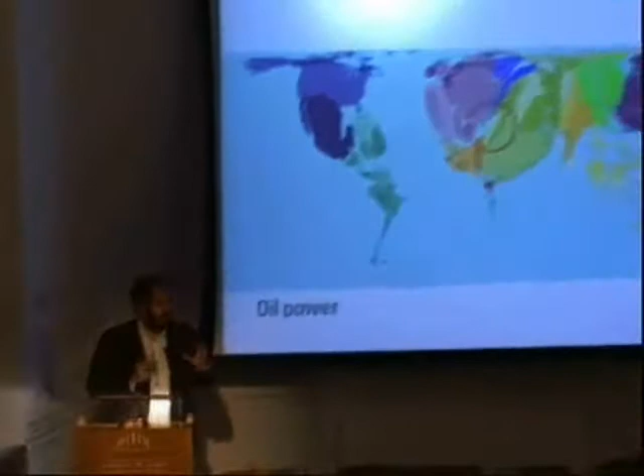This is the scale, a geographical map, but if I change some parameters in terms of dimension, this is a modification of a map based on oil power—a country using fossil fuel to run the country. That shows what it means for north and south of the world in terms of economy and development. You can see Italy is very fat because Italy is 80% dependent on oil.

But you can see also other countries like Japan, and I noticed Israel is quite big too. They're also showing the debate in Durban, which finished yesterday. I was there last week talking about some green schools and buildings.

I think the interesting thing in the Durban final chart is about transforming these oil power countries into green economy, shifting the CO2 emission also to green power and green economy. I think this is a really interesting thing.

But if I look from a different point of view, I can see what we call ecological footprint—the size of land we use for running our style of life. You can see again how one of the major points is not only the consumption of energy, but the style of our life, which demands more and more production, food, electricity, and many other things. So you can see the map is very different.

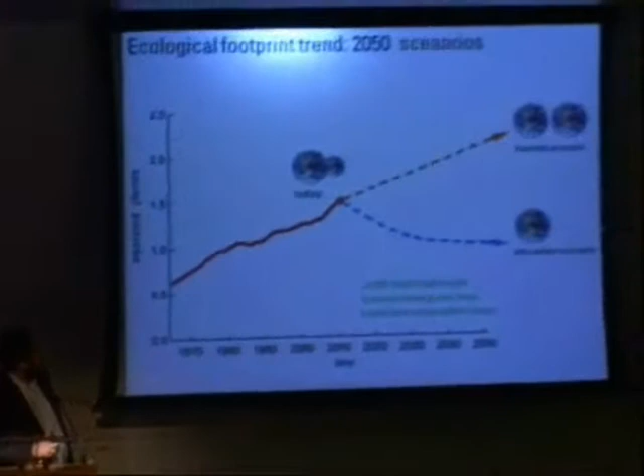Impact. Based on what we find as information, when we talk about zero carbon economy, or the green economy, I think we talk about something really serious, because I think we don't have an option—there's no option. If we run business as usual, and we're in 2010, I think we get a really serious problem in the next 50 years.

And that's why I think the agreement in Durban talks about 2020 and a vision of 2050, because as business runs today, I think there's no chance. So I think moving to zero carbon economy, or green economy, whatever you want to call it, is fundamental.

And then buildings can play a fundamental role. I must tell you why I think architecture is very important—whatever is important in any case, but buildings consume almost 50% of all energy produced, which means a very important issue is designing the next generation of buildings which dramatically reduce the demand for energy.

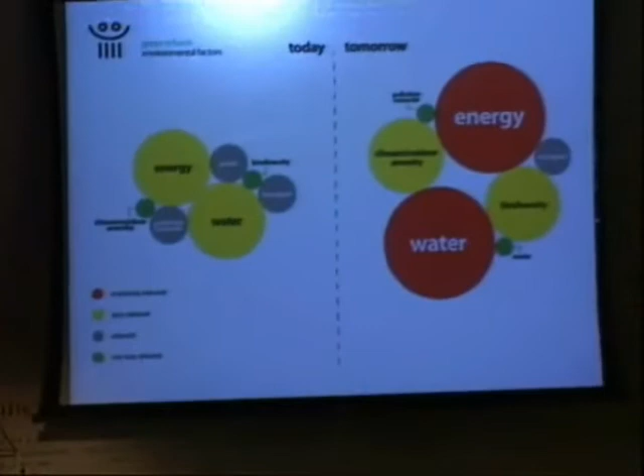I will bring this in to see what will be the major environmental factors. You can see from the colors what is extremely relevant and irrelevant. Today still energy and water are very relevant, but you can see pollution, transport, waste and other things too. But what happens in the next 20 or 15 years? Energy and water will be the two major factors of conflict, but also the two major factors we need to deal with, how to improve this relationship.

You can see pollution is reduced because if we switch attention to the new green economy, maybe electrical cars and more efficient systems of cooling and heating, then we will dramatically reduce pollution and noise in the next 20 years, but we'll still have quite a problem about climate/outdoor amenity. And of course the major point will be access to water.

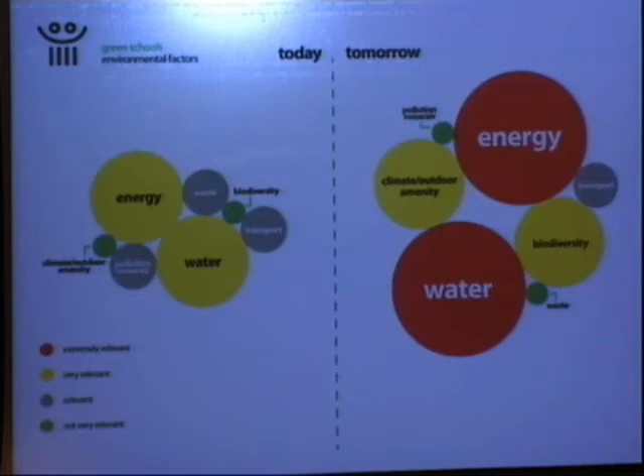So I think this also helps put ourselves in the agenda. I think when you design, you always need to have some priority in your agenda. If you just move environmental issues to the top of your agenda, I think you start thinking in a different way about your building.

Let me give an example of the timeline and how cost works in a building. So the two lines are the cost of structure and facade. I say that because sometimes we need to decide where we're going to put the money on buildings. Structure doesn't really change over time, it's always very solid, you're not going to move or replace the structure. The facade, over the life of a building, you maybe change twice.

M&E, mechanical and electrical engineering services, the life of this equipment is quite short, like 15 to 20 years, depending on the quality of the product. Of course furniture changes much faster, but IT technology we change very quickly, all the time.

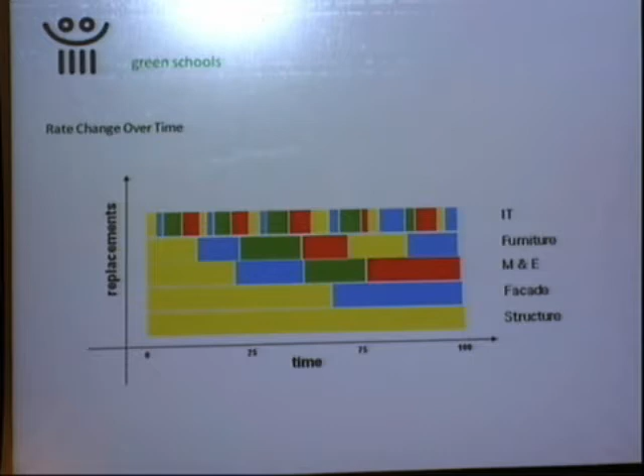So when I'm looking at this, I say maybe what we really need to invest in for the buildings in terms of the future is really the structure and the facade of the building, because they are the two permanent things that we'll be keeping for a long time. Investing in facade has become very important because you're not going to change it so often, and facade is always a sort of climatic moderator between outside and inside of the building.

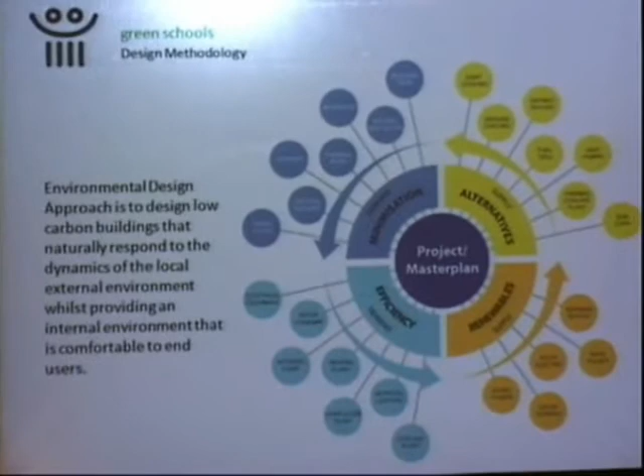And talk about sustainability. So I'm sorry to be a little bit like an engineer, but I'm not an engineer. But when we talk about solar energy, renewable energy, I think we need to understand and change the process of how to design your building to host this technology.

I think the circle starts from the first, the blue, about the demand. The first point in designing a green building is to reduce the demand of energy by minimizing it through design, using more passive strategies, like the orientation of the building, the thermal mass, the shading, the natural ventilation. So I think we need to minimize the demand to optimize the demand of energy.

And then the efficiency. So the way you're using machines, like in this case with geothermal energy. You start to design a building to reduce the demand, then efficiency in terms of machines, and then you can use solar energy or renewable energy, because if you don't do that process, there's not enough sun and there's not enough renewable energy to run buildings. And then also use the alternative.

I think this is very important, because sometimes architects - I say this myself because I know the work, I know my colleagues - sometimes you want to design a building as usual and then try to put in some solar energy technique, and this doesn't work together, because you need to first start the process of reducing the demand. To do that, it's time for architects - and this happens in many occasions - teamwork with the engineer is very important from the beginning. Because if you don't really create a dialogue between architects and engineers about the shape of the building, the orientation, some techniques, it's very difficult in the end to get really good performance buildings.

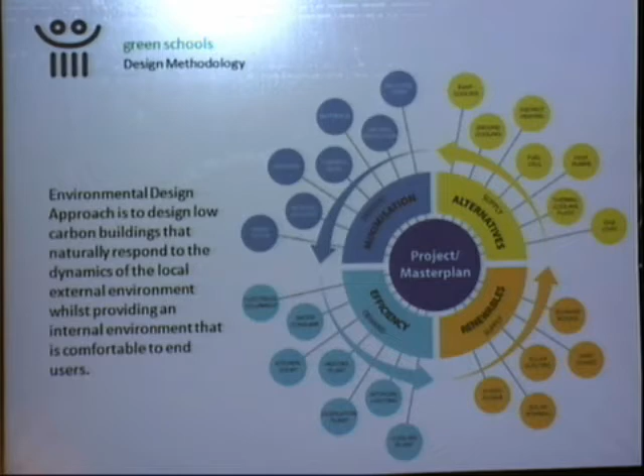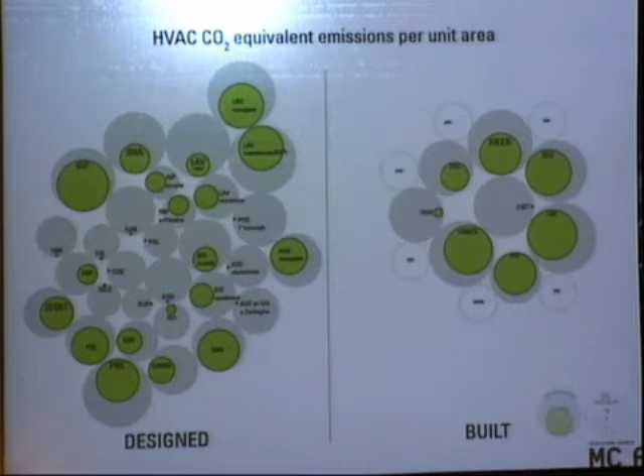And you can see there's constant work on reducing the building's impact. In China, we did 2 buildings, which was much easier - the difference was big. One of the buildings is a shopping mall, which is difficult to reduce so much, but still 30%. The other building, they tried to do the best. But I think what happened in these things...

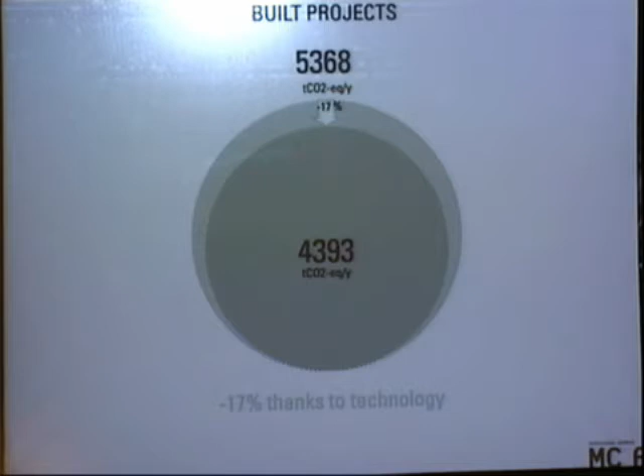...was very interesting when we did this analysis. So we reduced more or less always, by this work, a value of 55% of CO2 emissions through improving the machines and the design. But what we were very surprised by - and which I think is why architects are so important in this process - is that you can improve the reduction of CO2 emissions by using technology, of course, using more performant equipment. But I think the most part of the work is done by the design of the building.

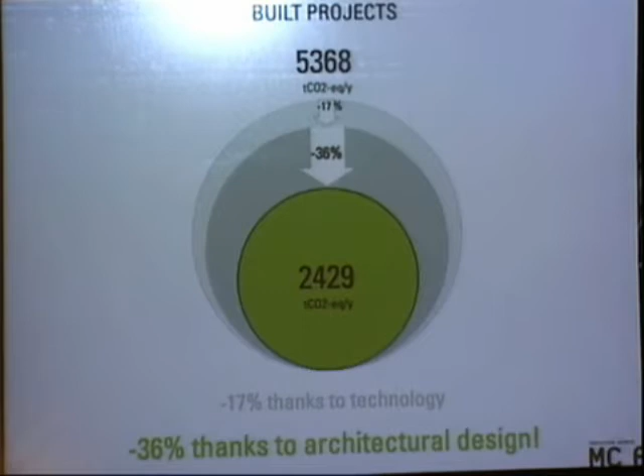So the way the building is designed, the way the facades are made, the orientation of the building, the strategy of passive or active strategy - that's showing, by the knowledge we have, the information we've collected in the last 10 years, how much really depends on the way the building is designed and the work of the architectural design.

So I say that because sometimes I feel there's always the hope that you're using technology to make your building green, and I feel that is quite wrong. You don't use technology to make your green building, but you design a better building, and then use technology.

So with this, how much CO2 emission we save in the last years, we make some calculations. There's a site on the internet where you can put the equivalence and it gives you the ton of CO2 emissions saved. I think the most interesting one is about Italian coffee every morning, and also showing the client how much money we save in terms of buying oils.

So in the last years working in different countries, what are really the two major issues in terms of politics? Diversity of culture and eco-solutions will be essential for people in the future. I'm saying that because there's a lot of conflict at the moment in different countries in Europe about pollution problems, traffic problems, health problems, hydrological problems. These aspects related to the environment are creating real attention, and it will be a political issue in the future - whether politics and political leaders are able to moderate this conflict.

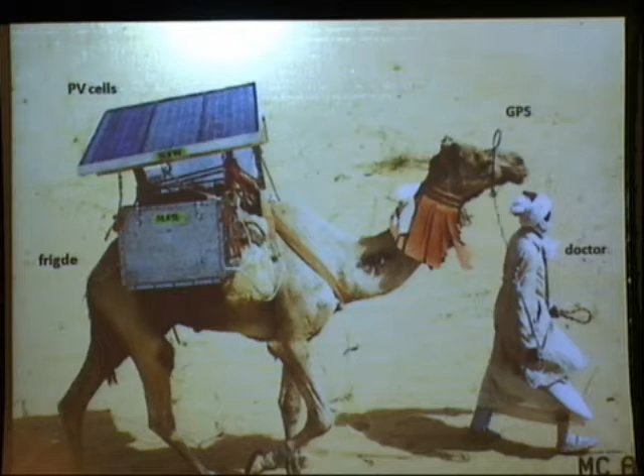So I feel we need to make a shift through knowledge as well as a technology shift. I think the problem is how we're able to have enough knowledge to design buildings properly for a climate, and then use the technology. In this case, you can see it's the most advanced technology with a very traditional relationship with that climate. It's impossible to go around the desert with a jeep because you need so much gasoline you can't make it. But these guys and these camels can. So I like this balance between technology and tradition.

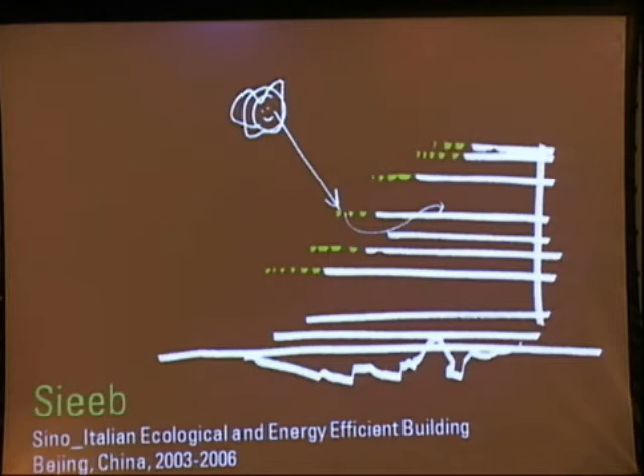So now I'll show you some buildings, because maybe you thought I'm talking too much and not doing my work. This is a building we did for the Minister of the Environment, in agreement with the Minister of Science and Technology in China, in Beijing. This is a building for a university building at Tsinghua University - actually the built environment department.

When we started the project, it was interesting because Italy invested 20 million euros on the Kyoto Agreement to show in China - this was a decision to show an eco-solution in a country growing so fast, which was interesting in terms of economy, business, and also knowledge transfer. So the idea of the building was to consider these leaves as our building, as a concept.

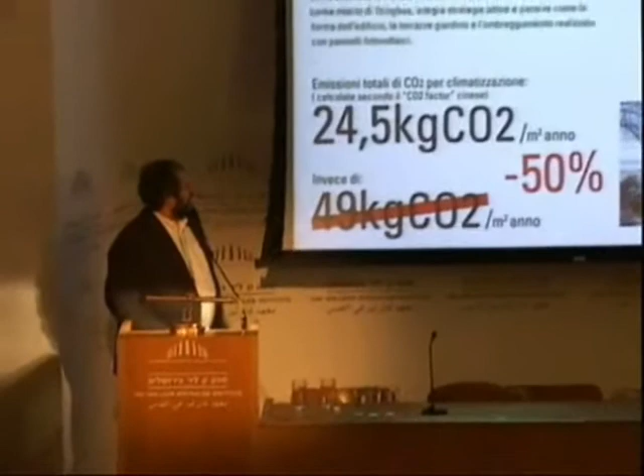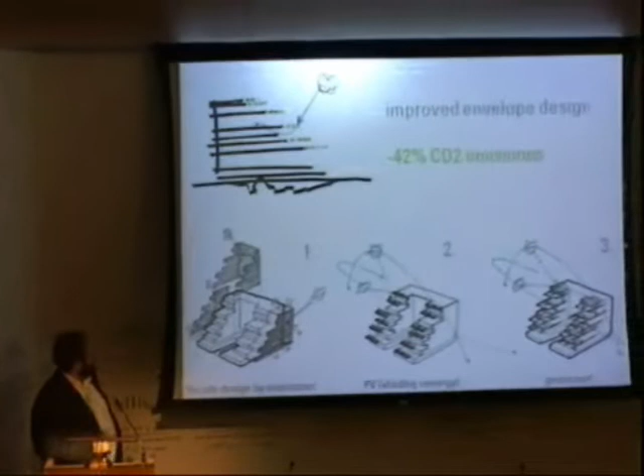The idea was to design this building based on this simple sketch - maybe it's over there, exactly. It's a building based on one direction, south and north. The green dots are south facing, and the wall is on the north face. There was a fix on that placement.

Then we analyzed with the Polytechnic of Milan, the university. We studied and did a lot of work on shading, shaping the building. We have these three strategies now. First, the building is facing south with a terrace, so we benefit to maximize the solar radiation in the summer and winter. Then the building has a wall, like a shoulder, on the north face, because the north face is where wind comes from the Gobi Desert in the winter.

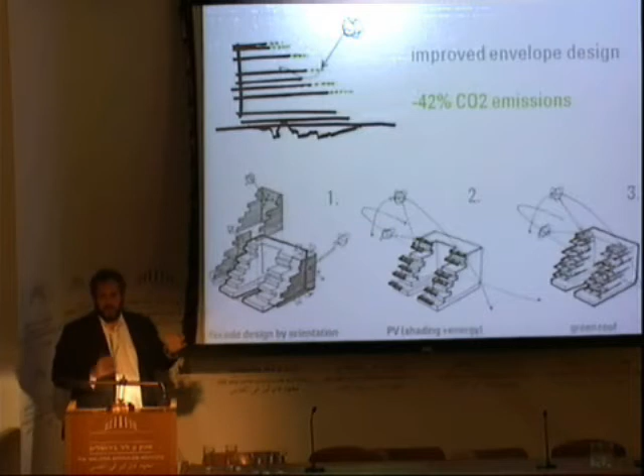It's very cold, freezing in Beijing for a couple of months, and we want to keep this building protected against this wind. So it's a combination of three basic strategies.

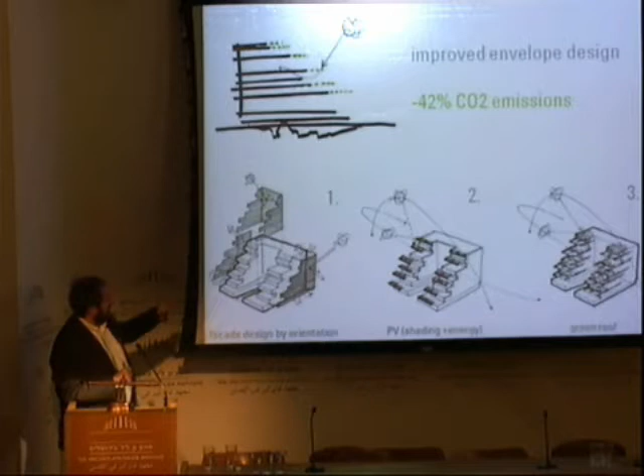The orientation, east and west, the facade allows us daylighting during the morning and the afternoon, so we have two wings that always benefit from daylighting. PV cells, photovoltaics on the roof and the terrace, providing shading and energy, and of course the green of the terrace.

And then the efficiency was done by, fortunately, the campus using natural gas for running the heating and cooling system. So we're using a cogeneration - a machine that makes heating and electricity, a low temperature system on the roof, on the ceiling of the building, and photovoltaics.

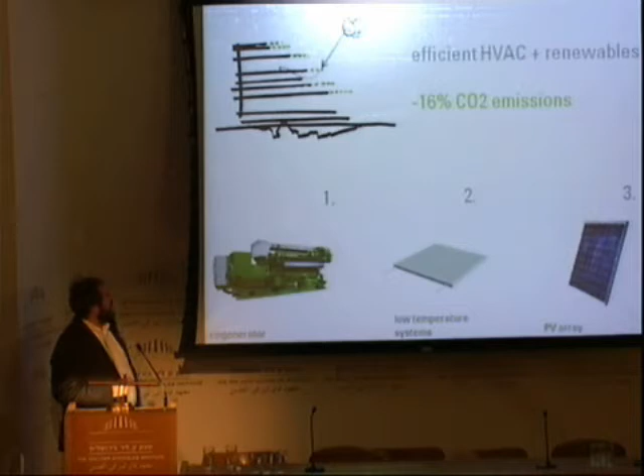The idea was, in the middle season, when temperature and humidity outside are quite in the comfort zone, to use the building and sell energy. So the building produces more than it needs, and sells energy, which I think was also one of the points of your institution. I think this is one part of the solution.

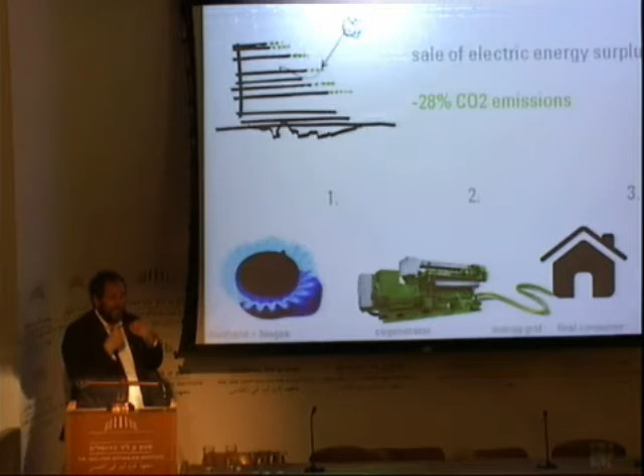I like thinking that the next generation of buildings are no longer the problem of energy, but maybe the solution to the energy problem, because every building can be a little power station that produces for itself, and when it doesn't need it, it can put it on the grid, which I think is absolutely achievable.

So that's what we say in the end - by using a different system of air conditioning and the building shape, we get at least 86% reduction of CO2 emissions based on Chinese buildings from 2006, which looks like a lot, but in reality the level of standard buildings in China was so poor that it was quite easy to improve faster.

I think it was a very interesting discussion in Beijing, because at a certain moment Chinese academics said, well, in China our buildings are fully sustainable because we consume 55 kilowatts per square meter, and Americans consume 560, Europeans 350. So they were showing there's no ecological problem in China, which is quite strange to hear from them. But then someone said, well, how do you do it?

They said, well, we only allow air conditioning 2 hours a day in the summer, and we only allow the heating system in the bedroom 2 hours at night in the winter. So, well, if you do it like this, it will be very difficult to compare consumption, because we are not living in dictator areas, and I hope we don't need to arrive at that point to reduce energy consumption.

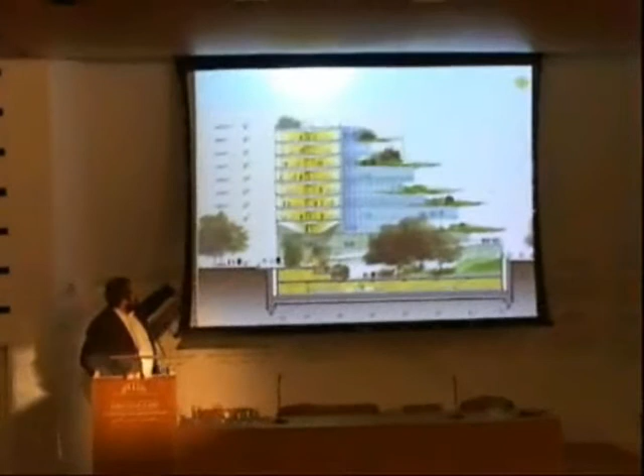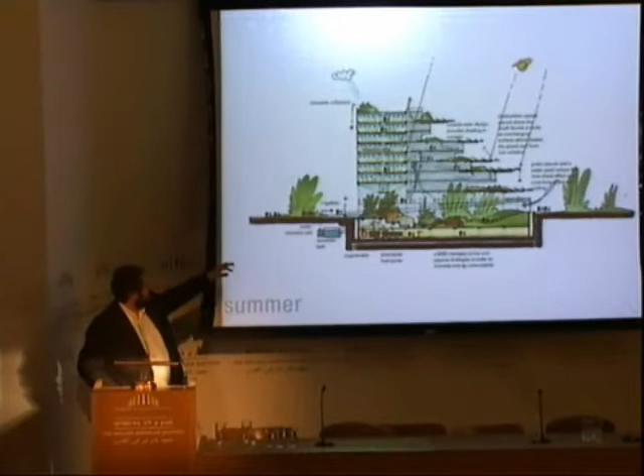And this is the section through the building. It's the 2 levels of parking, a garden. The strategy is about shading the building in the summertime, improving with the garden the ventilation and cooling through fountains and greenery, and in the winter, optimizing the solar gain, especially for daylighting and

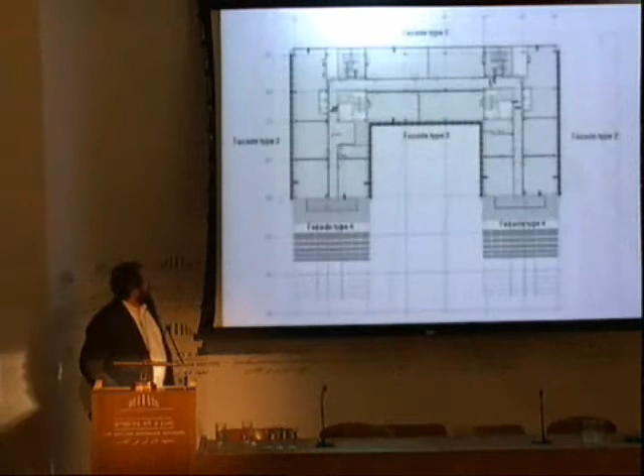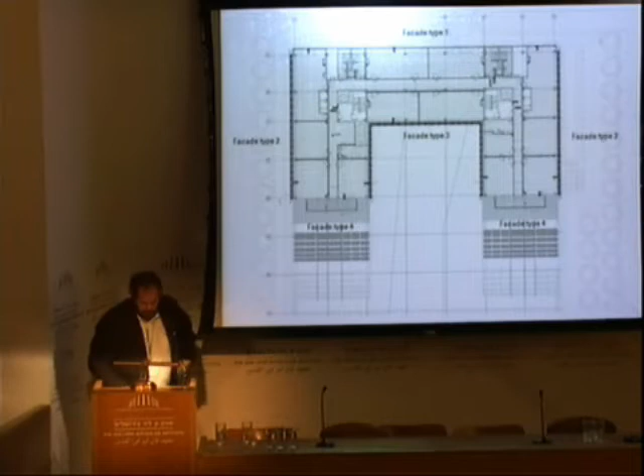So this is a plan. You can see the C shape helps us optimize the sun and daylighting during the day through the east and west facade. Also, this is the north face, very well insulated.

70% of the facade is opaque. You can see from here, very heavy insulation. And on the east and west, we're working with an open double skin facade, so we allow ventilation through the area between the two glasses. But behind, you can see, 50% of the building here is opaque and insulated. That allows us to reduce the demand of heating and cooling, but also increase the ventilation through the two gaps, like a buffer zone.

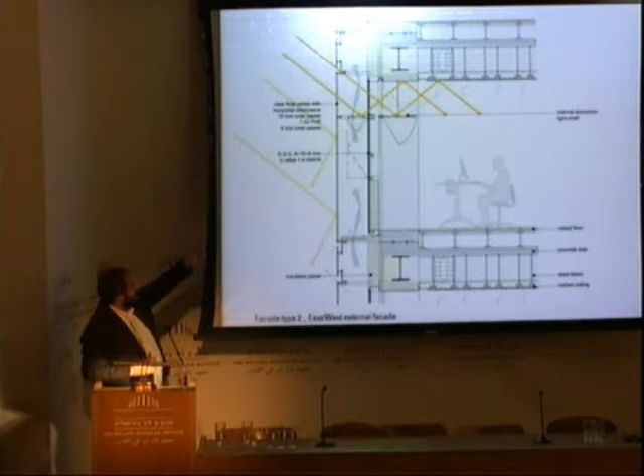And using some details, which is quite full in literature and architecture, the light shelf can help quite a lot, improving the daylighting inside of the building, bringing daylighting through the room.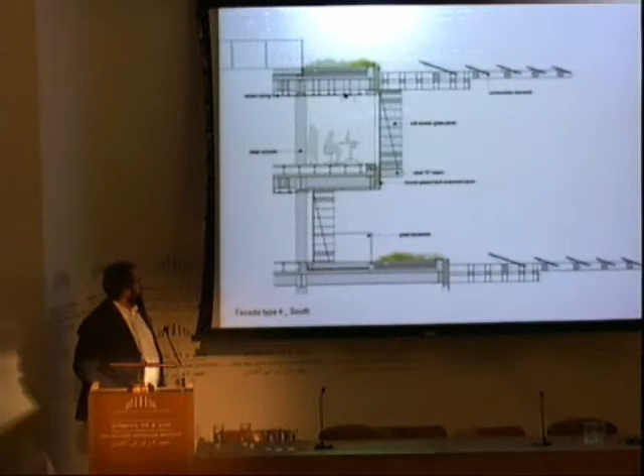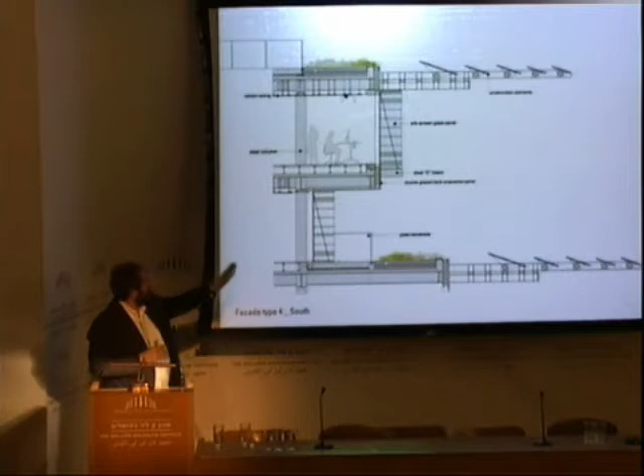And this is the terrace system. The idea was the terrace would grow with greenery, and the cantilever was another set of leaves, but photovoltaic leaves. Also these cantilevers help in the summertime to shade totally the south facade of the building. So you can see in these pictures the photovoltaics and the plants and the building.

And this is the internal garden. So it was very important that the building was open. You can cross the building. It's not a wall.

The first level on the ground was a public exhibition center and a conference hall, and the first floor was another exhibition. So you can see this is the entrance of the conference, and that's the building from the street.

And that was a very interesting experience, also because the Tsinghua University is very knowledgeable on green issues. It was a very good partnership also between universities in Italy, and then I did this project for social housing.

There's a big debate, and I noticed in the newspaper that also here was a big debate by young people about affordable housing. Well, in Italy there are 5 million people who have very difficult access to housing, whether renting or buying, and a young couple also have very difficult access to housing.

So we made a proposal. I'm not designing a residential building, but in this case I think it was very important to give an example, and we studied housing by three points.

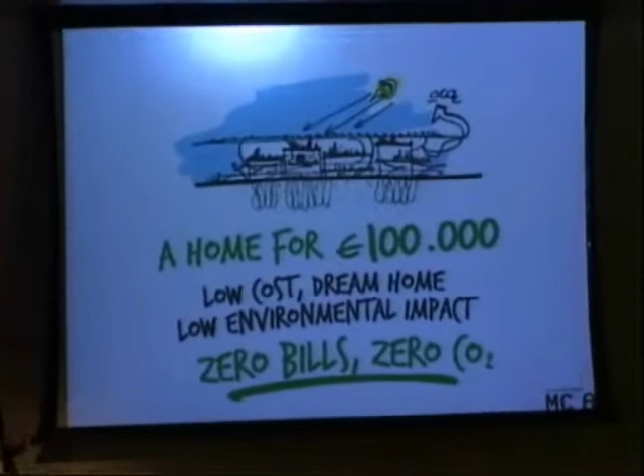Especially if you design a building where, in this system, and also by the Italian regulation, if you produce clean energy, your kilowatts is paid 4 times more than a standard. So if you're able to have a very low energy performance house, you can sell the energy, and get a microcredit, which is about €200 a month, enough to pay half of the mortgage.

So why are we not going to do it? Why not? Let's start to think that maybe construction is a problem, something polluted using material, but maybe construction is also something that's solving problems. I want to look at this as a positive action.

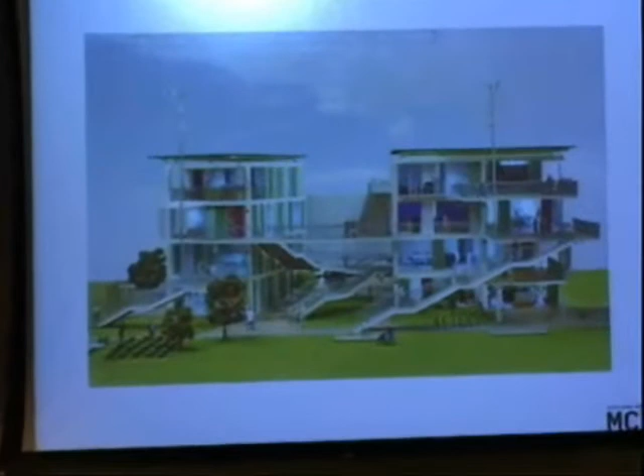This is a model of a different organization of housing. There's no single lift with stairs, but a different way you access your apartment. There's a lot of demand for community, in Italy but also across Europe from families we've worked with. There is demand for a creative sense of community in buildings, not a sort of 'nobody wants to know their neighbor.' That's partly true, but not entirely. I think architecture can help improve, or not improve, the quality of relationships.

And of course, it's combining the two techniques, the geothermal that we heard about today, and electricity from the solar panel.

Now we are under construction of public buildings close to Bologna, for the Agency for the Protection of the Environment. It's always a question of tools. Architects use pen, AutoCAD, drawings, models, but also there are environmental tools. This picture shows a laboratory in Lausanne, Switzerland, with an artificial sky, a place where you bring your model and analyze the quality and quantity of light inside your buildings. That's a new generation of tools.

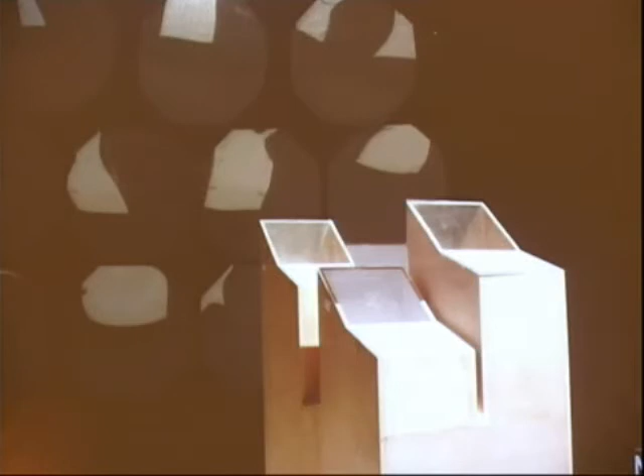It's a toy also, because it's quite funny. But also you can use digital tools, whatever you want. I'm always very interested in the practical activity—you make your models, bring them to a laboratory, and run your tests. A day of testing in the laboratory costs €500, so it's not tied to any fee on the project. The models cost around 150, and we run all this analysis.

And of course we also use Radiance. In my office we have different expertise—we work with engineers, fundamentally, and they do the work. But especially in the preliminary stage, you may not have the chance to work with all the engineers and pay fees to everybody, because the client asks for a preliminary design. We have two architects working on simulation, coming from PhD studies, and a model maker who builds all the models.

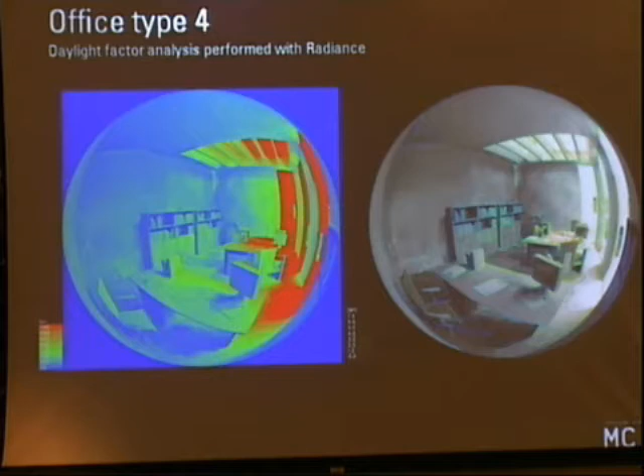That helps us at the beginning of the process to make the first analysis, so we know where we're going. Of course, we're not trying to replace the engineers, but they work with us—in the beginning, we do this kind of analysis.

This project is about what I call forms and performs—how much the form of the building can help its performance. This is a single-floor building, a laboratory and office, with a roof shaped like a chimney facing the sun. We're in a very hot climate, in the plain, a low area with a high level of humidity. So especially in summer you need to increase natural ventilation for more airflow, and in winter you want to use the chimney as a collector of hot air.

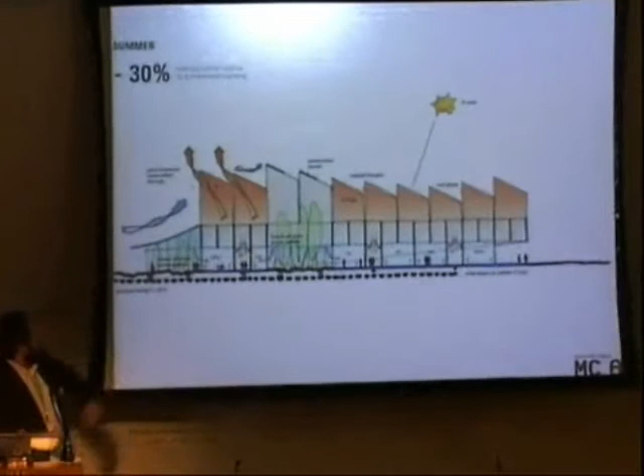Of course, that's not enough on its own—you need a radiant ceiling and a bit of fresh air. But what I'm saying is, if the building itself, through its shape, is already able to do some of the work, in this case we're talking about 30% energy saving in summertime.

By using this chimney effect, collecting hot air at the top, we increase ventilation inside the building through this garden. Or in winter time, on sunny days, we collect hot air at the top of the chimney and with the fan mix and warm the air to recover the system. So in some way we try to optimize with the shape.

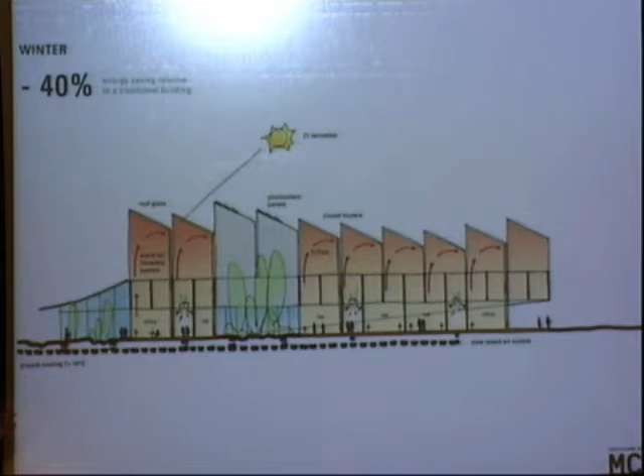And here you see the models. And this is the project.

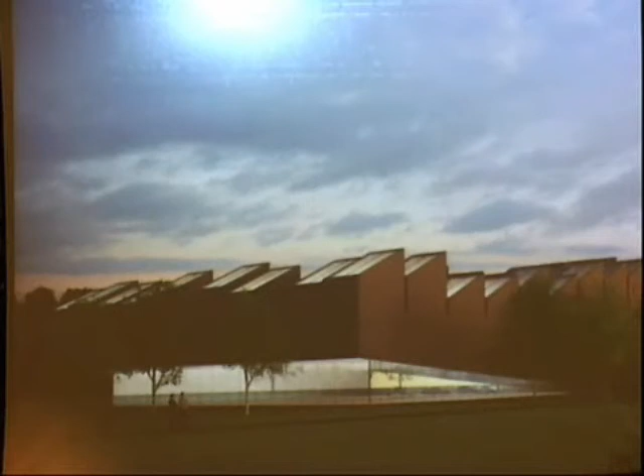This is the first public building done in Italy built only in wood construction, done by a company from the north. We're not very far from the forest, and it's a company that does all prefabrication in wood. It's a clean site, only a platform in concrete, and then everything is built on site with a prefabrication system. If I have a little more time, I will show this.

Okay, thank you, I hope you appreciate the work. So this is the 3M company, the American chemical company, which has a very high policy on sustainability.

We did this work for them, the headquarters in Milan, in a very busy street outside of Milan, close to the airport, with this kind of effect, and basically nothing really around. The building was done as a very standard office building, because when we work fully on the market, we are not doing a special building, we're working on offices, university buildings.

Sometimes I think there's no real point in investigating or rethinking performance in terms of efficiency of an office space. There's a whole history about grid structures and dimensions of the space. So we worked to maximize the use of this rectangular space, with the building oriented north and south, and this is east and west. So the building explores ideas of how to deal with this.

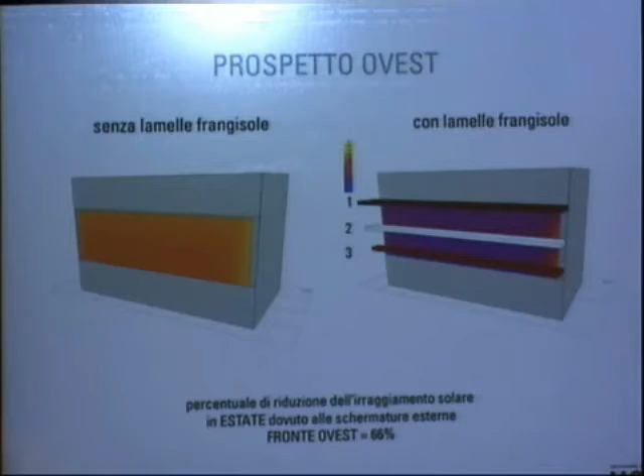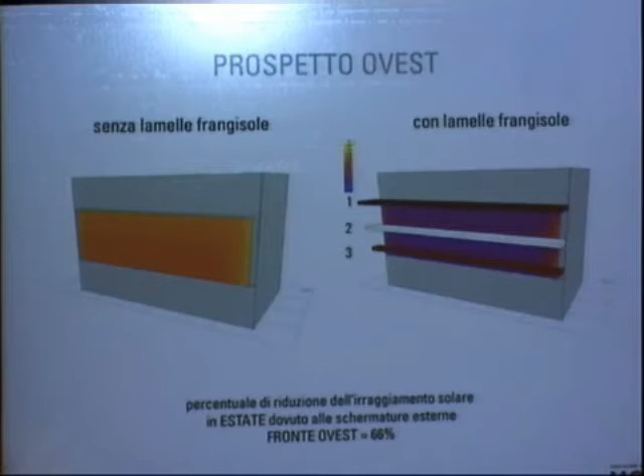Why are the elements of the facade so important? Because you can see, without louvers and with louvers, how much you reduce the solar radiation on the facade. The benefit is in terms of reducing the cooling demand, but also in terms of comfort.

When you make a glass facade, you have a problem when you come very close, because you have air conditioning and whatever, but when you come close with your seat, your table, the radiation and surface is very hot. So you need to move your table and you don't optimize the use of the space. That's the work done by the louvers, reducing heat so you can be very close and maximize the use of the office space.

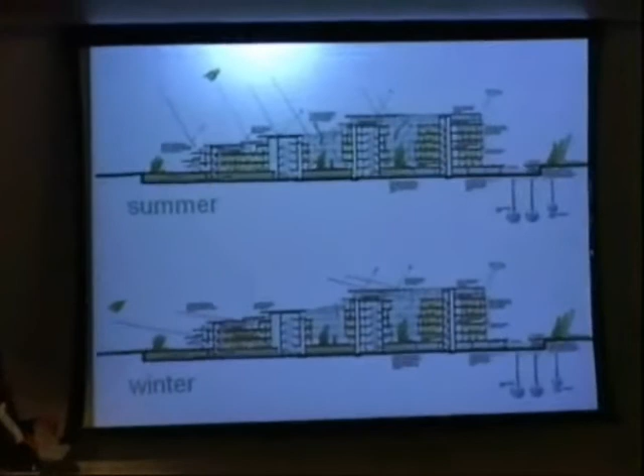And we have two little courtyards, which we use to ventilate the building. Of course, the client invested in 2,050 square meters of photovoltaics on the roof, bringing the building's CO2 emissions down, because we use the PV cells to balance the use of electricity.

And this is a classical speculative office building. I mean, it is in the market, costs 1,500 euro per square meter, which is perfectly in the market.

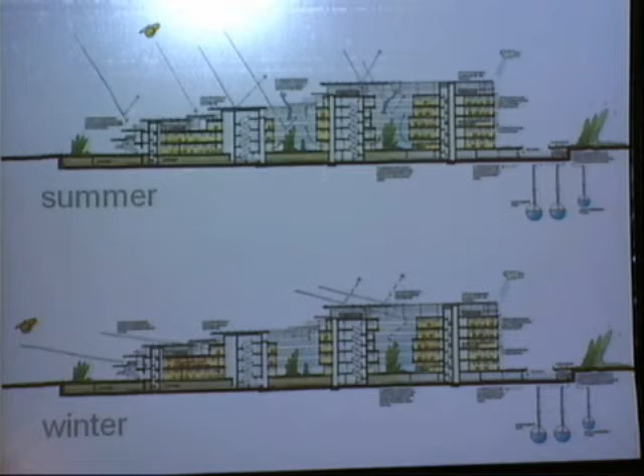What I'm saying is really the question is how you think about your building, not how much money you put into your building. Of course, it is an extra cost because the client put in 2,000 square meters of photovoltaic and spent quite a lot of money, but the building can be run in any case. So it's the way you use knowledge to use the money.

And this is the detail of the building. And that was another really very interesting experience in China. I'm a visiting professor in Nottingham, and I was asked to make this little center for sustainable energy technology, which is actually a PhD student building on that matter.

Nottingham University made an agreement with the Chinese government to build a new campus for 22,000 students, built in just 18 months. This is the Chinese way to do it — a huge campus. One of the major sources of profit for campuses in England comes from Asia, but they started to reduce entries because it became too expensive.

So they built an English campus, where some students could go to do only the master's degree in England, but complete the diploma in China. It's huge, and then they asked me to design a small building, less than 2,000 square meters.

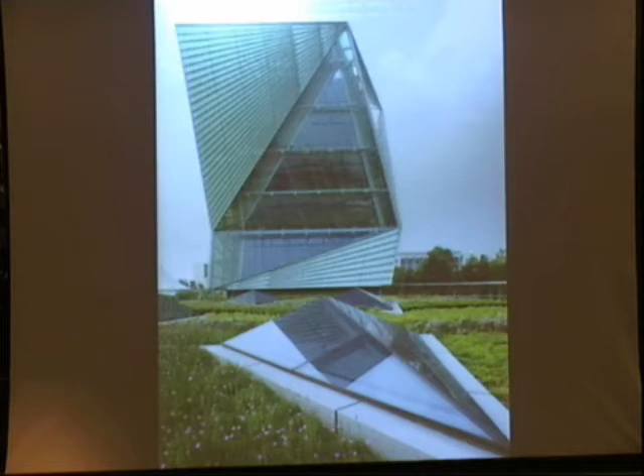The other part of the building is a sort of double skin which helps ventilate it, but it mainly works on this one facade, the only facade of the building. Now let me show you the strategies.

It was a funny story because this was a donation by a Chinese Hong Kong developer, 38 years old, who made a fortune building in Hong Kong and China. He decided to give this as a present to his wife, because I think he'd given her enough diamonds already, and said he would make her a center of research instead.

I thought of it as a female building, since it was dedicated to his wife. In our presentation, the idea of the building was like a dancer — full of movement, with no one side the same as the others, expressing in some way the ideas of gentleness.

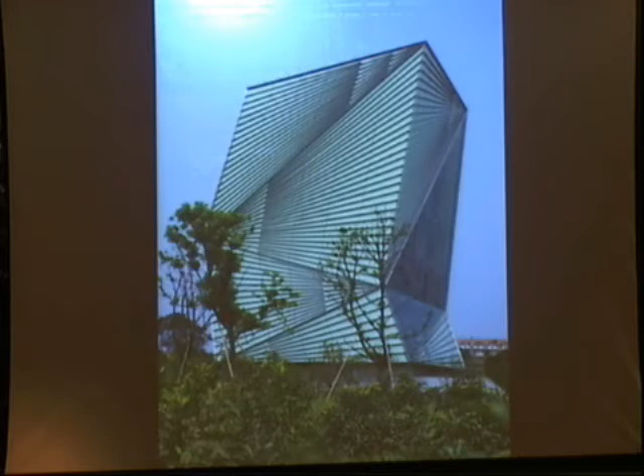That was the opening concept. Part of the laboratory is semi-underground, with the classrooms up on the floor above. This is part of the double skin, opened up, and you can see the big walls behind it, which are the very well-insulated walls.

When they asked me how many photovoltaic panels I wanted on the facade, I said none, because I don't think we want to showcase that in the architecture. Green architecture isn't only made by photovoltaics and windmills — that doesn't make sense. They're terrible looking; you see many buildings covered in these photovoltaic facades, and I find that really, really terrible.

I think what we want to express is not only the technology, which is fine, but the combination of different techniques, because the future of building isn't related to just one technique like before, where an air conditioning system would cool all the air and do everything. It's about combining different techniques — the design of the building, thermal mass, ground cooling, the evaporation system, natural methods. It's a bit more complex, but that's the only way to do it.

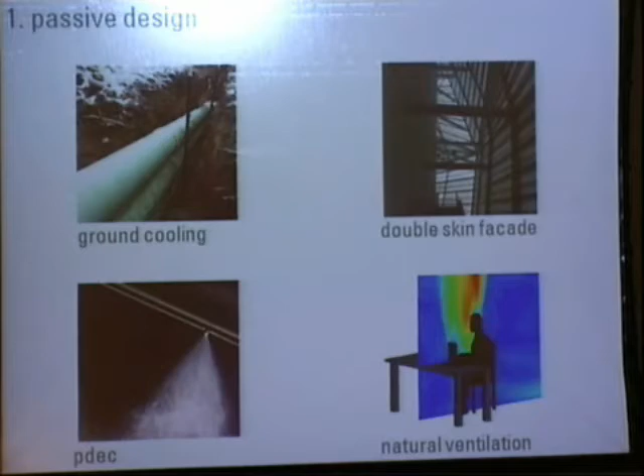So the sketch we did overlapped with this performance. The idea is combining the ground floor, which is a very large area touching the ground, with ground cooling — moving the air through the foundation.

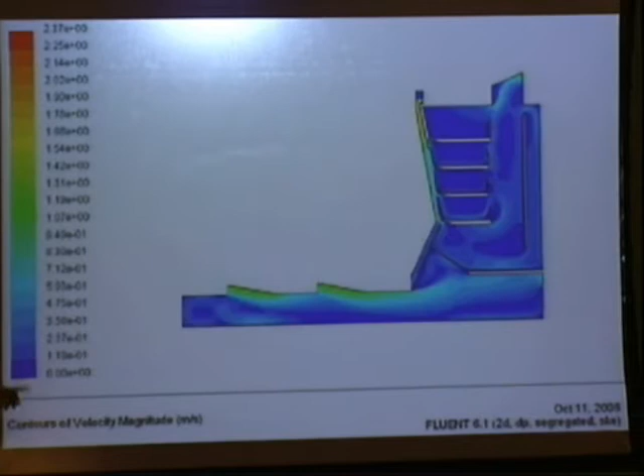Using a little system of a chimney around the stairs to improve the ventilation to the top of the building, and using the thermal mass of the floor for heating and cooling the building. Maybe I'll show you, this is much easier.

As a center for sustainable technology, I think this was a showcase. We need to show there's a system of geothermal, a cooling system for cooling and heating the building by the ground, a thermal mass with water coming through the concrete mass, and ventilation. When you want to do a sustainable building, you need to think seriously about combining all these techniques. This was incredibly successful, because in the end there's no single solar panel show. This was done with our engineer in Nottingham, and of course it's a lot of scientific work.

Sometimes I feel when we talk about architecture only as an aesthetical problem, we lose the fundamentals of architecture. Architecture, of course, is an aesthetical action, and must be as beautiful as we can make it, but behind architecture is scientific work. Sometimes people ask, are you an artist? I'd be very happy to be an artist, but unfortunately I can't, because my work is fundamentally scientific work. I need to deal with contractors, technology, cost, regulation, and also be an artist to make a nice building. But this is part of a very complex process.

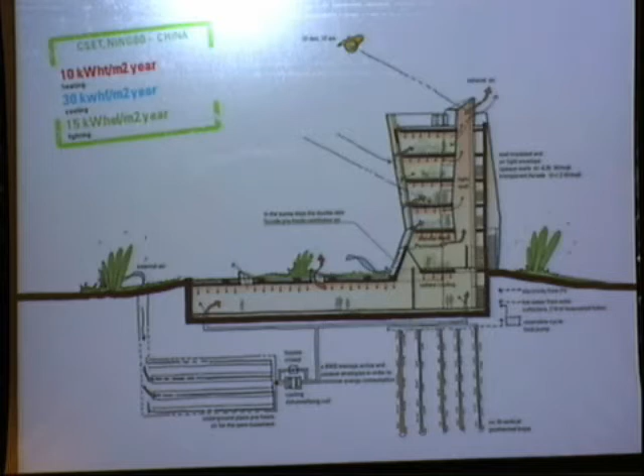So this is the winter strategies, using the thermal mass of the building, using all the possible techniques to show you how to deal with this, and of course combining the technology.

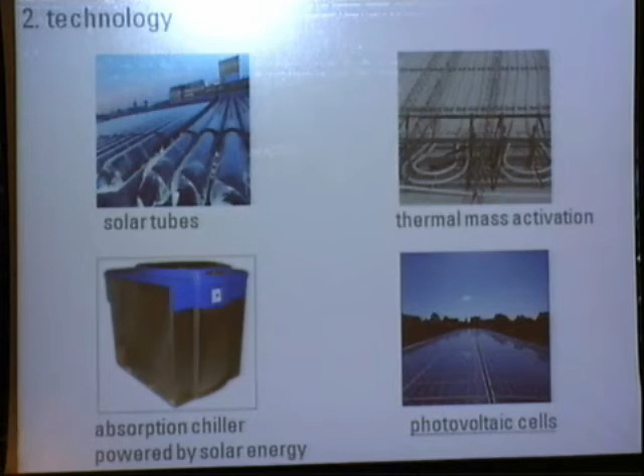This is an absorption chiller, and that's the building in the end. The only thing they made against my point of view is this little windmill, because they say we can. No, we did it, but we are making the wrong picture here. No, these are the only things.

I resisted, but it was impossible for me to avoid it. The photovoltaics were done in another area, like a vegetable garden, in front where there were all the panels and everything. It's much easier to clean and maintain. And that's the little lantern.

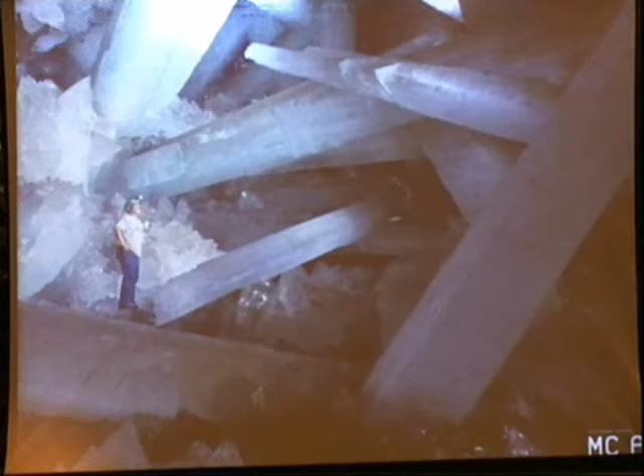Then I'm doing a very interesting project in Africa for an English developer, an office building in Accra, which is in a tropical area. The first question for this building is how to design in this kind of climatic area, because Ghana is a very nice country, but all of West Africa is still underdeveloped. Nigeria with Lagos is the booming area, but Ghana is also growing. The GDP of Ghana is about 13.5% growth, so it's a country moving very fast. How are we dealing with new buildings in this area?

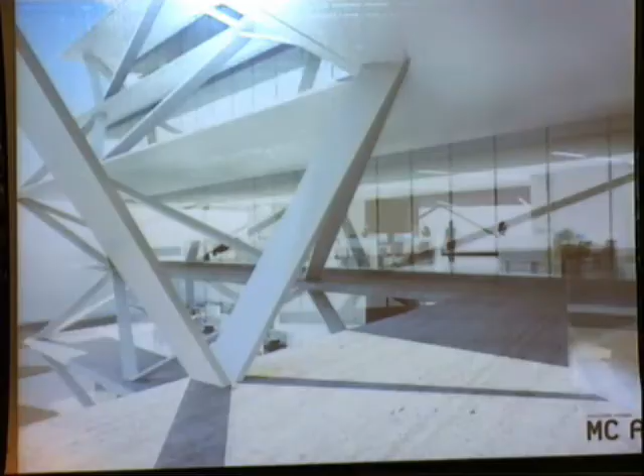Using different references, the first idea was that the sun goes vertical very quickly from the morning because we are almost in a tropical area. In the morning the angle rises very quickly, stays up, and then goes down very quickly. So the most important thing is to shade the building, and that's why the building is done with these cantilever floors.

Maybe I can show you. Yes, cantilever floors. When you have these cantilever floors, you can have a totally shading facade, and the facade, set 2 or 3 meters behind, can be totally transparent because there's no solar gain. It's fantastic, it's the first time we are working with no thermal bridge, which is very good. This is one of the problems we always design for, and here there's no heating problem, so the only problem is cooling and managing the daylighting, which is sometimes too much.

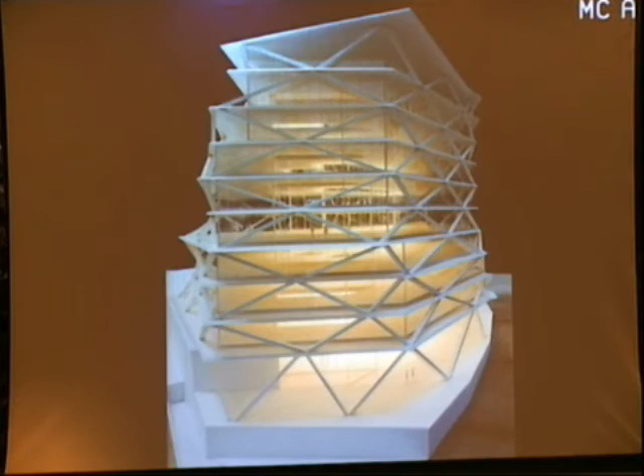So this is the building. It comes like a palm, the palm tree I showed before, with this hexagonal system. We thought of something organic like this, and it's imperfect, because I find the research for perfection in buildings is sometimes quite strange.

I mean, like temperature. We talk about green buildings and then we want 22 degrees and, I don't know, 65% humidity fixed all the time. When we step outside this door, there's another world. But we want this perfection only inside our buildings, and then it costs a lot of money in terms of energy.

So maybe we need to change the parameter of what temperature and comfort mean, and maybe talk about adaptation, so we can adapt ourselves to different conditions inside the building. That's our engineering work.

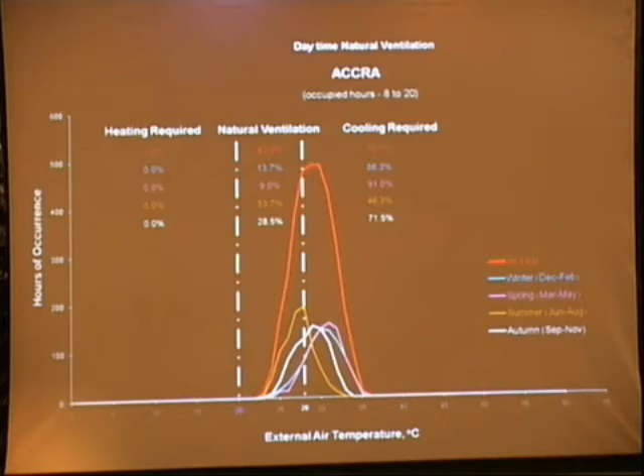We made this analysis of temperature and humidity in the area, and we see there's a 28.5% occupancy range between 20 and 28 degrees. We can improve using natural ventilation because we're close to the comfort zone. So the building part of this analysis looks at how the floors shade the facade, and how we can improve ventilation using this big patio, through the windows, through the office, inside the patio and outside. This is under construction, so it will be a good example.

As I said in the beginning, only by a good architectural choice - you make the first choice a cantilever because you want to shade, then you do whatever you want. But already with this we reduce the demand for cooling peak load, which is very important. The consequence is that once you've made a good effort to reduce the demand, you then have other strategies.

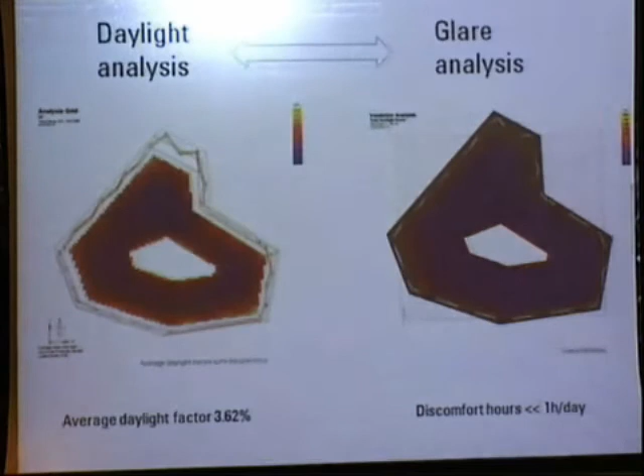This is about the lighting. We don't have a problem of glare. And this is the patio with all this connection through the building. And this is the appeal.

I think these are the last two projects, and I'm very attached to the last one, which I hope you appreciate.

This was a military camp - there was a wall all around, it was closed, and it was well known because the Alpini, the mountain military, trained here. Almost all the Italians went through this building. Then there was a change in policy, and they started selling all these public buildings to the local governments, who decided to make a new campus for the university.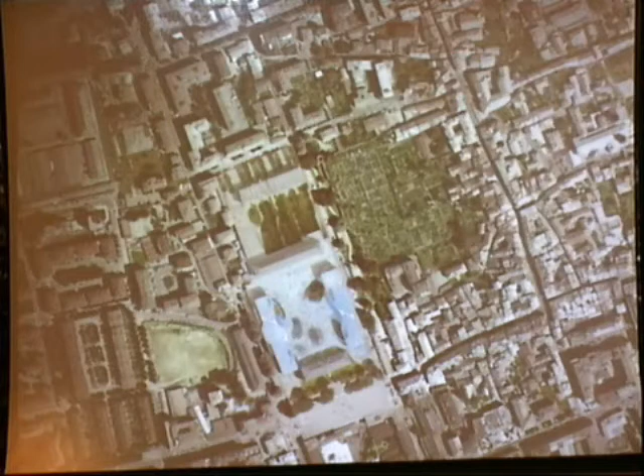It's about 2,000 student buildings, and we kept these existing buildings - there are two existing office buildings, and we demolished the two wings to rebuild these buildings for academic classes and everything.

The idea is always - I always question myself where the project starts, where's the moment of your thinking? We were near a glacier, it was very cold, and I think the shapes were quite interesting - architecture made by nature. So we started with this thinking.

And that is the model. We keep the existing two buildings, and these are two pieces like melting glass, or ice, with ideas. There's a big parking underground here for the city, a public parking, the new square, and the two academic buildings, which are simpler than you'd think.

We wanted to make a real difference from the architectural system of the 1900s. Almost all that architecture is done by repetition - tick, tick, tick, tick, all the windows. This isn't only military architecture; architecture at the beginning of the century was made with ideas of repetition and decoration. So we thought to change this.

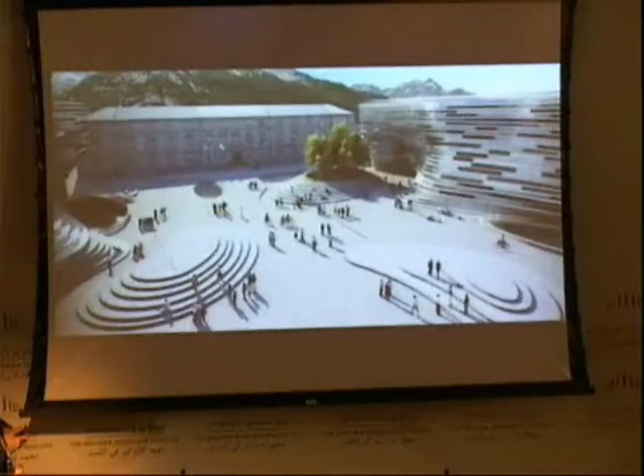So that's the map. A lot of this facade is opaque because we are in a very cold area. But strange enough, in the summertime, because we are on the plain, this area reaches 28, 30 degrees. So it's an extreme condition between winter and summertime.

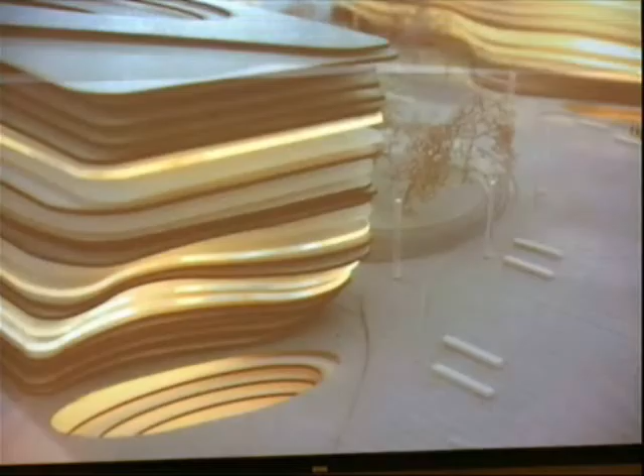But the work we did is because we are starting with this project. We think about the classroom going out like this in cantilever, and then we make the analysis, and it was unable to reach the level of certification asked by the client. So of course there's a lot of perimeter of glass, there's a lot of area exposed. So we start to move to more compact buildings.

It was a very good exercise to pass from here. It was an exercise in the beginning to try to optimize, because we see that by optimizing the shape, you increase the performance. And from this to a parallelepiped, a cube, there's not really a lot of difference in terms of performance.

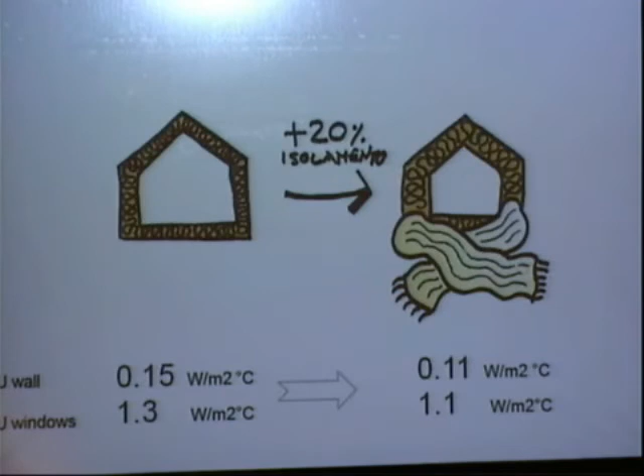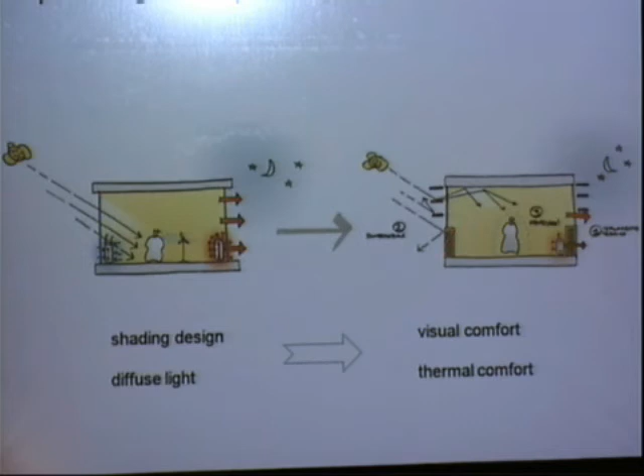And of course combining two techniques, one using - instead of geothermal, we're using water, a water table. Because Aosta has a big steel industry which is closing down, and they're using a lot of water from the underground. The moment they stop, the water comes up quite quickly because it's not being used anymore. So we're using cold water from the ground for cooling and heating the building, and covering all the building in photovoltaics, making the building zero emission.

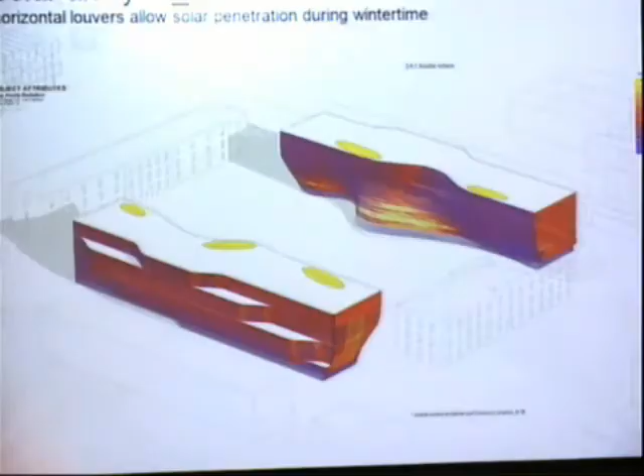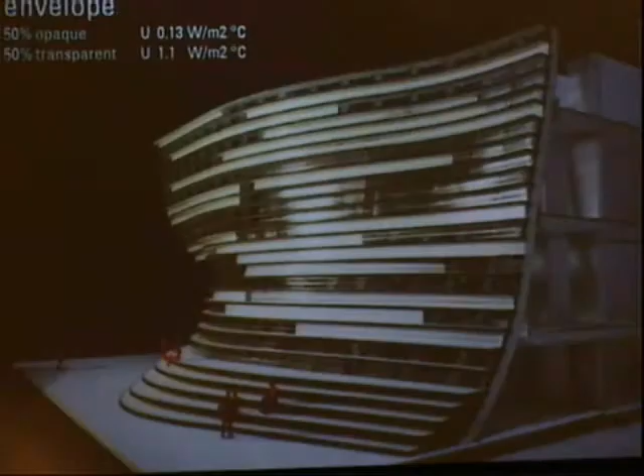So that's what I'm saying before. Now we study the shape through the Ecotect system and try to optimize the curve and maximize the use of daylighting. And these are models of the facade and internals, and then the building seems nice.

So now I come to the last one - I was involved last year, I've been in Jerusalem many times actually, with the Italian cooperation, and we did a project for green schools. There was a joint venture with UNRWA, the agency for the Palestinian refugees, and the idea was working with them, elaborating a prototype of school. It was actually recently presented in Durban, and we also received the money from the Islamic Bank.

So the idea was designing a building in a very extreme condition. This is a building for Gaza, and it's a school. I've been visiting, and well, everybody knows the story and the situation. For me, the challenge was: if we are able to design a building in such an extreme condition in terms of resource and climate, I think it's a symbol - if we're able to do it, I think we're able to do it everywhere. And I think this is the message of this project.

Well, of course, there are many aspects of this project, which is about collecting rainwater. It's still raining, it's still 400 millimeters of water in Gaza Strip. And we maximize the use of solar shading and improve the thermal mass of the building. This is a very low-tech building because there's no money, as you know.

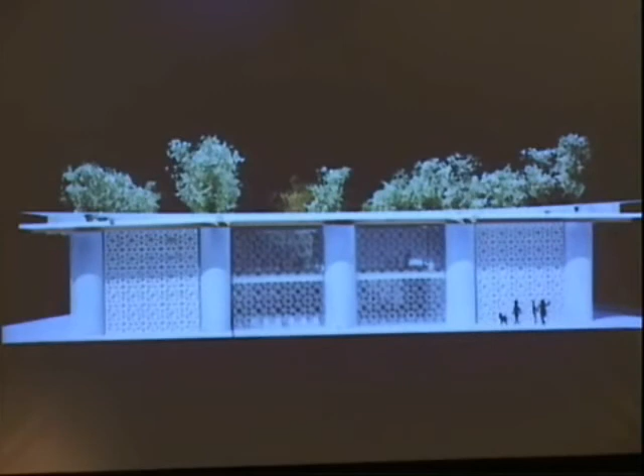But that's the effort we did. Using these big columns in concrete, using a pipe system - they're empty, then we build very quickly, put the earth from the excavation in, creating a very massive thermal mass inside of the building. The roof is like a scoop for collecting water, and through this cylinder full of earth we can plant trees, and the trees shade the building.

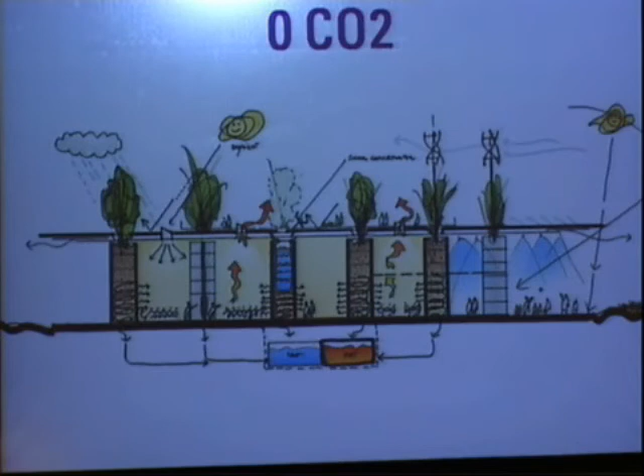So, but mainly the idea was to maximize the thermal mass, collect rainwater, shade the building, use the height for ventilating the building, and stratification of the hot air at the top. And this is the technique and system of construction.

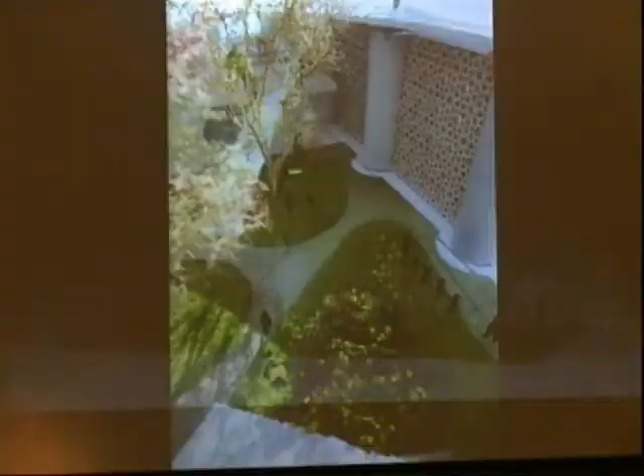I think this is the plan. I thought using this big column would help us, using this column as a thermal mass capacity. During the night they are cooled by ventilation and release this temperature during the day, but we also have to keep some temperature in the winter to release during the day. So we are now using almost nothing.

And this is the building, and I'll show you some of the strategies. Mainly the building works with this system of tanks for collecting water. The wetland helps us filter the water through the roots of the plants and put this clean water back in the cycle, using this rocky bed for pushing air slowly through the class, and using a solar chimney which becomes very hot and sucks air like a chimney, increasing the ventilation inside the building.

There was a lot of resistance, of course, to doing these things, but now we are finalizing. They gave us a site, and we are now planning through the construction problems, because there are a lot of problems with materials and other stuff. We've started the simulation with Nottingham about optimizing the section and checking the ventilation and other issues relating to the air through the rock bed.

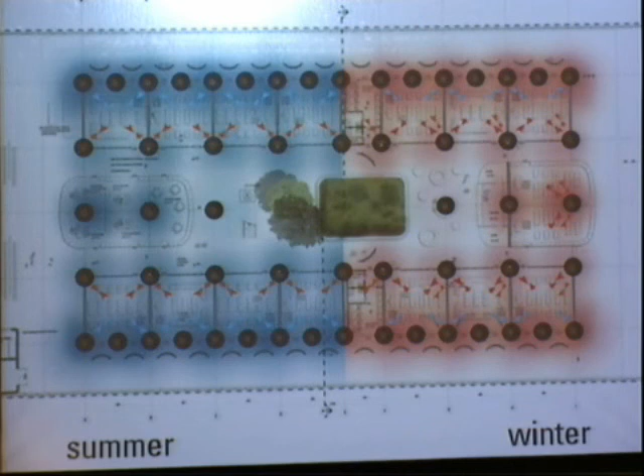So the idea, this is a little bit graphic, but to say the columns are big, they're really acting like a thermal mass inside the building and ventilating through these columns.

And of course, everything - somebody talked this morning about it - but I think we need to trust our children and teach them from the beginning. Buildings are, in some way, an educational process, because if you live in it, it's like everybody of us is an educator. We are all educating people and children. But buildings can play a fundamental role, because if you live in a proper building and these buildings work, you can show the performance, and you can also show you can live in a better environment - that can really be a serious process of education.

I think we need to trust and build more green buildings to show that the road is possible, and it's only a question of knowledge and ideas to do it. We need to do these things. I think we have everything in our hands - we know the technology, we know how to do it. What is the problem? And sometimes I feel politicians don't really get the feeling of how to deal with these things, because the arguments are not so clear.

So anyway, I'll just finish here. This is the logo of our school, which is, of course, the section of the school, the roof with the trees and the columns, but also our two kids hugging each other. Okay, thank you very much.